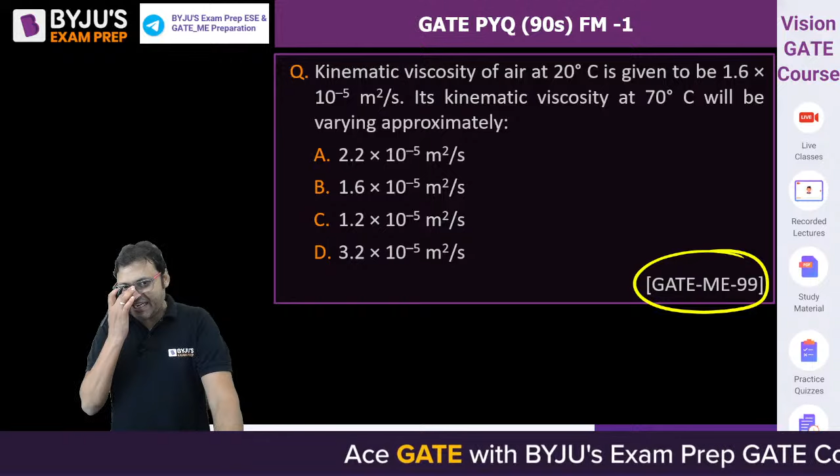Let us start with the first question from viscosity, a very important property asked in GATE. The kinematic viscosity of air at 20 degrees Celsius is given as 1.6 into 10 to the power minus 5 meters square per second. What will be the kinematic viscosity at 70 degrees Celsius? If you know the answer, if you have solved this question, please share it and give it a try. In the meanwhile, let me discuss the solution with you.

The viscosity of a gas depends on molecular momentum transfer or molecular collision. Viscosity of a liquid depends on cohesive force, whereas viscosity of a gas depends on molecular momentum transfer, which depends on molecular velocity. So viscosity is proportional to molecular momentum transfer, which is proportional to molecular velocity, and according to kinetic theory of gas, molecular velocity is proportional to T to the power 1 by 2, absolute temperature to the power 1 by 2 — that is the dynamic viscosity. The density of a gas is inversely proportional to temperature.

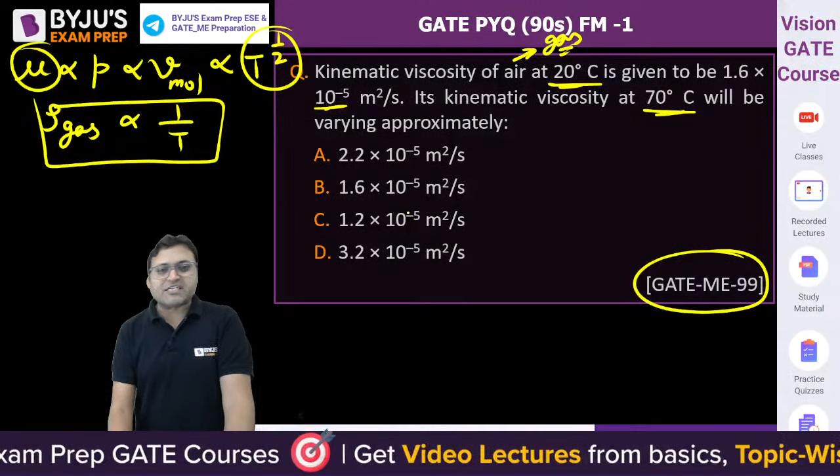So dynamic viscosity is proportional to T to the power 1 by 2, and the density of a gas is inversely proportional to temperature. So kinematic viscosity, which is dynamic viscosity per unit density, is proportional to T to the power 3 by 2. This is the relation for kinematic viscosity of a gas with temperature, and T must be absolute temperature. If the question is about dynamic viscosity, use T to the power 1 by 2, but if the question is about kinematic viscosity, use the relation that kinematic viscosity of a gas is proportional to T to the power 3 by 2.

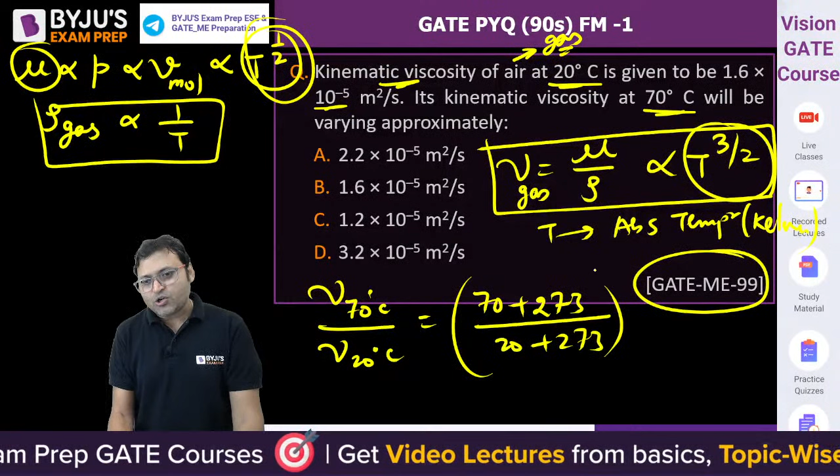So kinematic viscosity at 70 degrees Celsius upon kinematic viscosity at 20 degrees Celsius equals 70 plus 273 — it should be in Kelvin, since absolute means Kelvin, temperature must be in Kelvin — upon 20 plus 273, to the power 3 by 2. The kinematic viscosity at 20 degrees Celsius is already given, so you can find out the kinematic viscosity corresponding to 70 degrees Celsius. It will be around 2.02 into 10 to the power minus 5 meters square per second. Please check, it will be around 2.02 into 10 to the power minus 5.

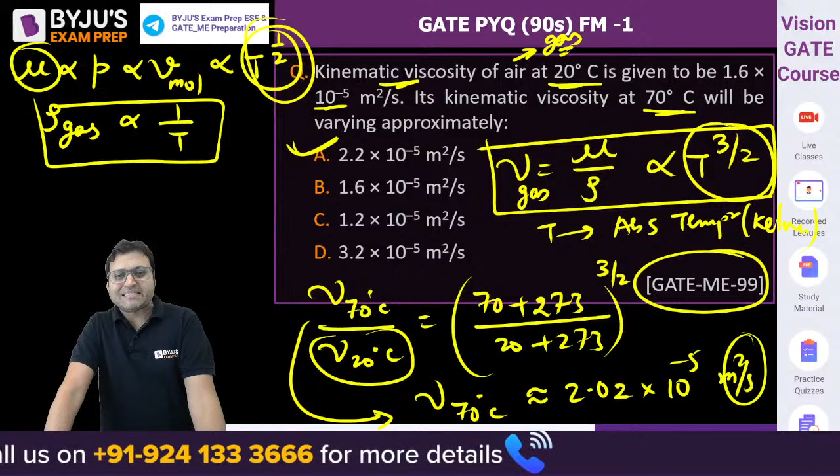So the nearest option, that is why it is mentioned as approximately, is 2.2 into 10 to the power minus 5 meter square per second. I hope it is clear to everyone. Yes or no? If you have any doubt, you can always let me know through the comment section. Let us move to the next question.

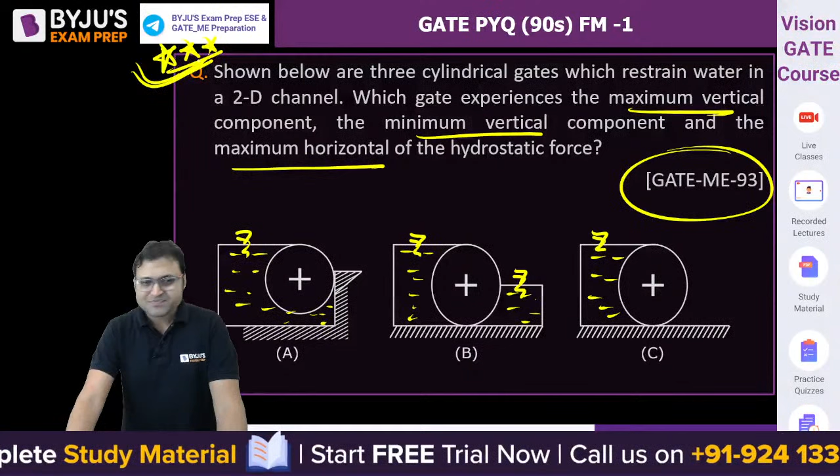This is a very, very beautiful question, a masterpiece. Shown below are 3 cylindrical gates which restrain water in a 2-dimensional channel. There is water here, in three figures. There is water here as well as here — this is the free surface, this is the free surface. And in the third figure, the water is here only. Now we need to find out which gate will experience the maximum vertical component, the minimum vertical component, and the maximum horizontal component of hydrostatic force. A very, very beautiful, marvelous question. Let me discuss this question.

I will add one more figure. Let me add one more figure — D. Now try to understand.

The fluid is water. Let us talk about the horizontal component of hydrostatic force. How do we calculate it? By taking the vertical projection.

Let us assume the cylinder has the dimension L into D, where L is the length of the cylinder and D is the diameter. So if I ask you for FH1, take the vertical projection of the cylinder.

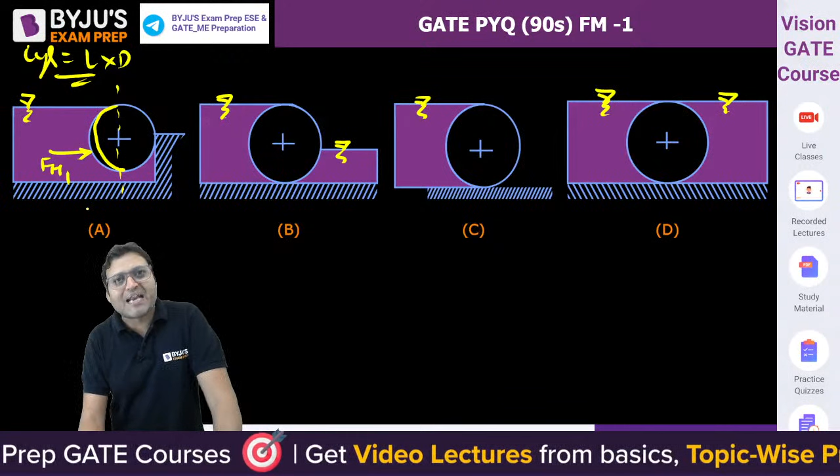That vertical projection will be a rectangle of dimension D by L. Apply rho g a x bar to the vertical projection. So FH1 will equal rho of water into g into area, which is D into L, into x bar. X bar will be D by 2.

This is FH1. For all the figures, FH1 acting on the right hand side will be the same. Now let us talk about FH2.

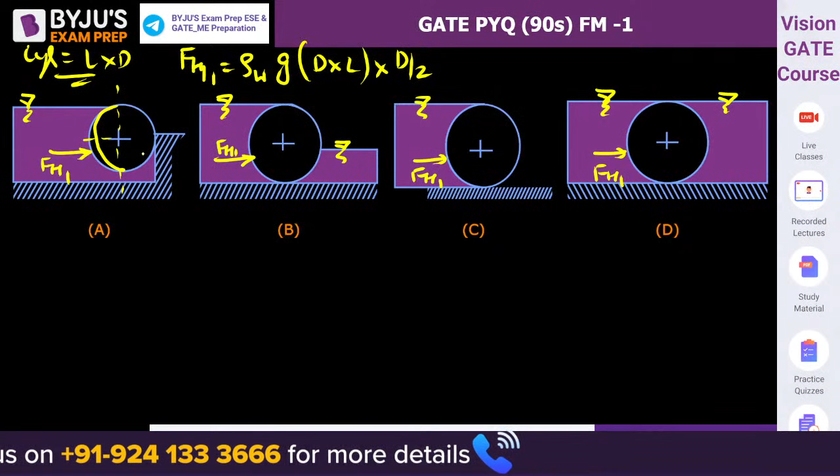Now for FH2, we will start from the right hand side. Do you agree FH2 acts here? Can we say FH2 will be equal to FH1? In figure D, FH2 will equal FH1. And what is FH net? Net horizontal force is FH1 minus FH2. Agreed or not?

FH net equals FH1 minus FH2. So in figure D, FH net will be equal to 0.

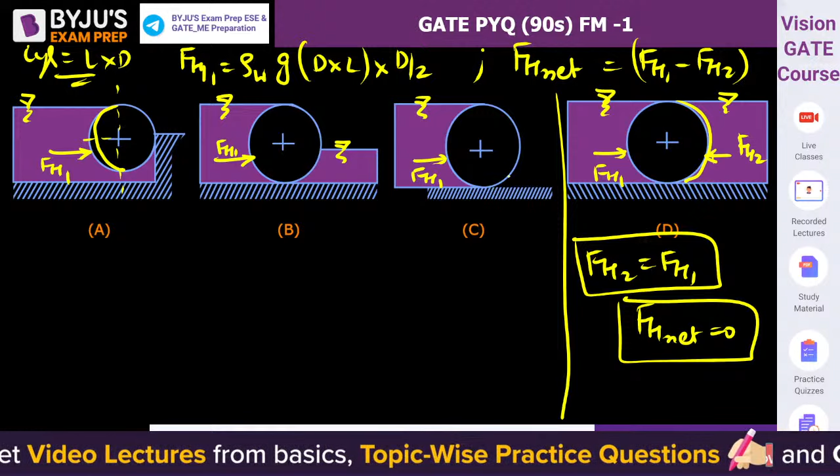Now similarly in figure C, do you agree FH2 is equal to 0? So FH net is equal to FH1 only.

That's figure C. If we talk about figure B, this will be FH2. Take the vertical projection. So here FH2 equals rho of water into g into area, which is D by 2 into L, into x bar.

This is the free surface. X bar is the depth of the centroid of the vertical projection from the free surface. So it will be D by 4. FH2 will correspond to D by 4.

Now if we talk about figure A, the FH2 projection will be the same, but the free surface is here. This is the level of the free surface. So FH2 is rho of water into g into area of the projection, which is D by 2 into L.

But if we talk about x bar, then it will be D by 2 plus D by 4. Do you get it? In figure A, FH2 will correspond to D by 2 plus D by 4.

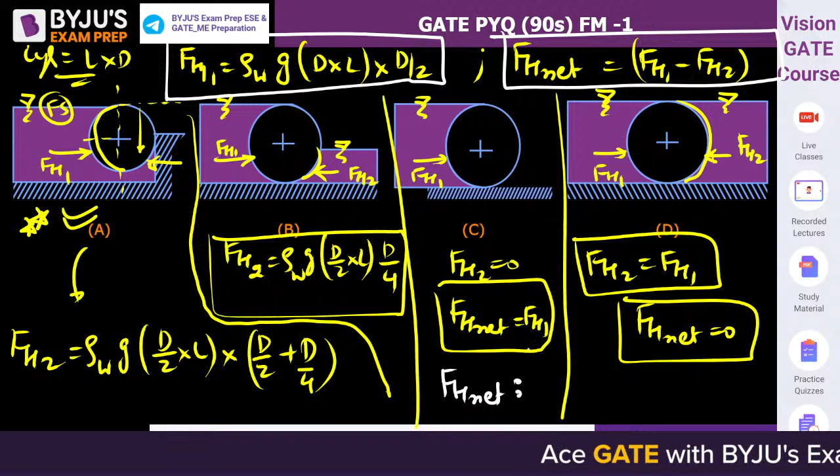So if we write the decreasing order of FH net, do you guys agree with this? FH1 is the same for all, and FH net equals FH1 minus FH2. So if we write the order of FH net in decreasing order, which will have the maximum? That is C. C will have the maximum and D will have the minimum FH net.

And out of A and B, FH2 in A is greater than FH2 in B, isn't it? So do you agree the order will be B and then A? This will be the order: C, B, A, D. C is maximum, then B, then A, and finally D. This is FH net.

Similarly, if we talk about FV net, FV net is nothing but the buoyant force. This is the buoyant force. FV net is the buoyant force.

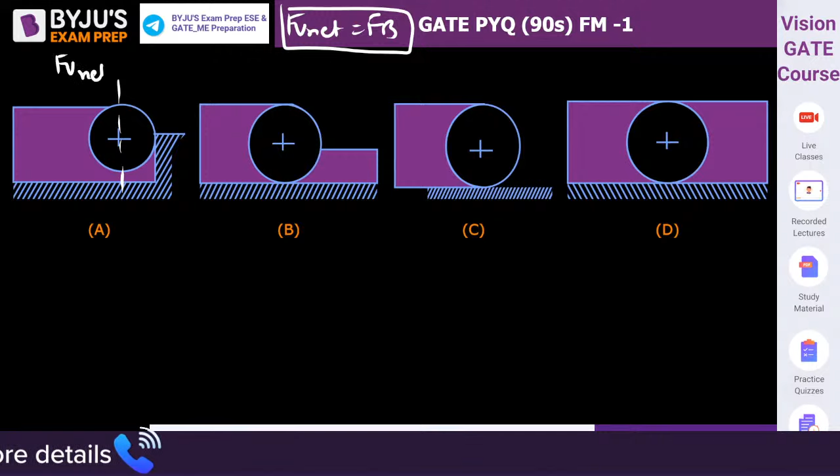So if we calculate FV net, the vertical upward force is FV1 plus FV2. Let me start with the first part, call this FV1. This will be given by rho into g into V by 2. FV1 equals rho of water into g into volume by 2.

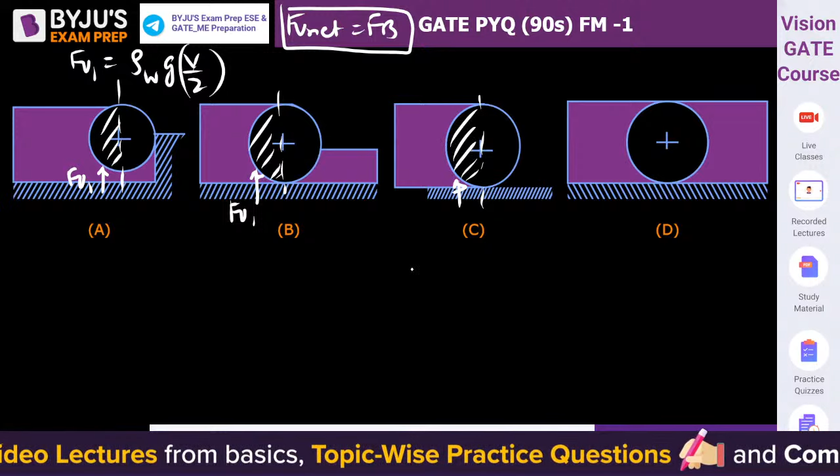Similarly, for the second figure, FV1 is the same. If we talk about figure C, FV1 is rho into g into V by 2, because there is a downward force on the top and an upward force on the bottom. Similarly for figure D, FV1 will be the same in all figures.

Now, if we talk about FV2 in figure D, we can say FV2 equals FV1. And what is FV net? That equals FV1 plus FV2, because both are vertical. So FV net here will equal rho of water into g into V. That is FV net for figure D.

So FV2 is equal to 0 for C. So FV net is equal to rho into g into V by 2, only FV1. If we talk about figure B, rho into g, what is FV2?

FV2 is equal to rho of water into G into V by 4. So FV net will be equal to rho of water into G into V by 2 plus V by 4, that is 3V by 4.

Now if we talk about figure number A, that is most important. Weight of the fluid displaced by the body, the free surface is here. In figure number A, the free surface is here. So what we need to do is find out the weight of the fluid which is displaced by the body.

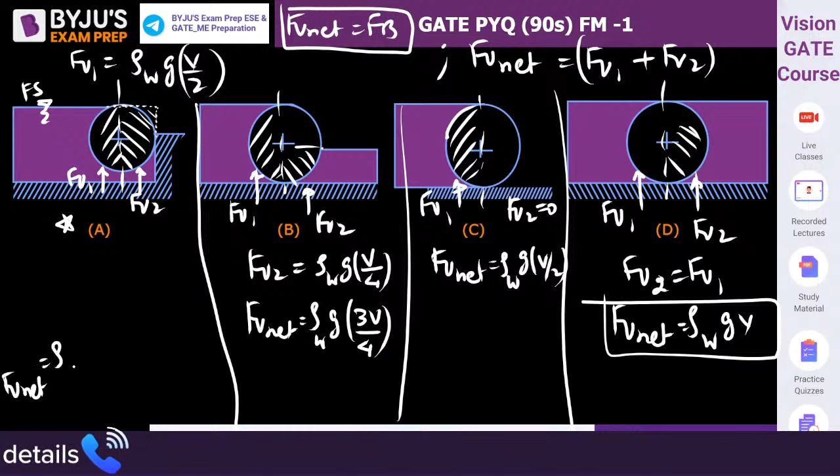This will be FV net, this is FV2. FV2 will be given by this. So here FV net is equal to rho of water into G into 3V by 4, plus D by 2 into D by 2 into L. Other than 3V by 4, this portion will also be there, so D by 2 into D by 2 into L.

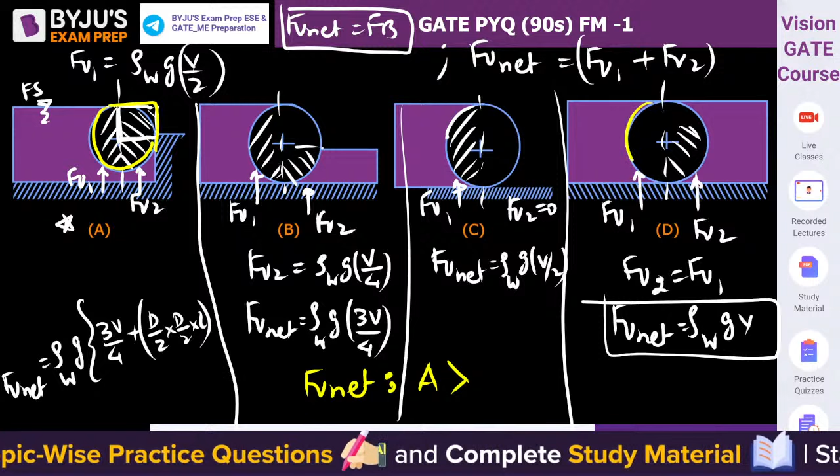So the maximum is in A. If we talk about FV net, maximum is in A, it is more than the volume of a cylinder. Then it is in D, equal to volume of the cylinder. Then it will be in B, 3/4 of the volume of the cylinder. These are the buoyant forces. Finally C, which is half of the volume of the cylinder. Do you agree? This is how FV net is.

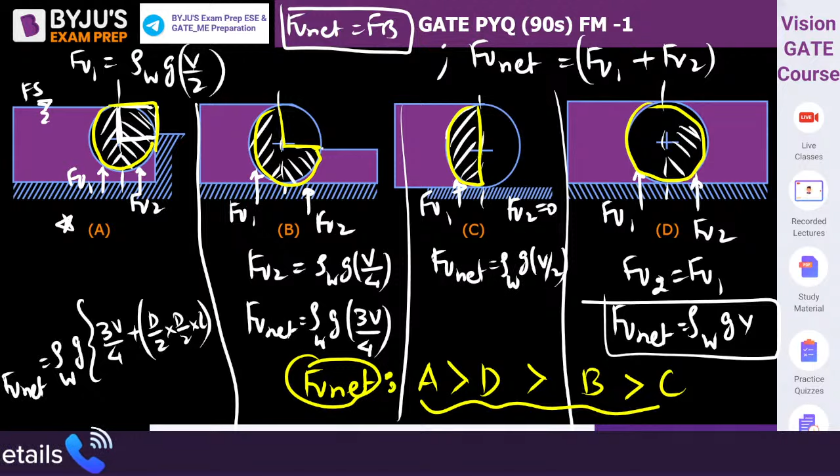This is the decreasing order. No two figures will have the same FH or same FV. This is the buoyant force, this is the buoyant force. So if we solve this question, the maximum vertical component is in A. FV maximum is in A.

The minimum vertical FV minimum will be in C. And FH maximum, out of these, which will have FH maximum? FH maximum will be in C. These will be the answer. Do you understand? Is this all clear? Yes or no? Everybody please write in the comment section if it is all clear to everyone.

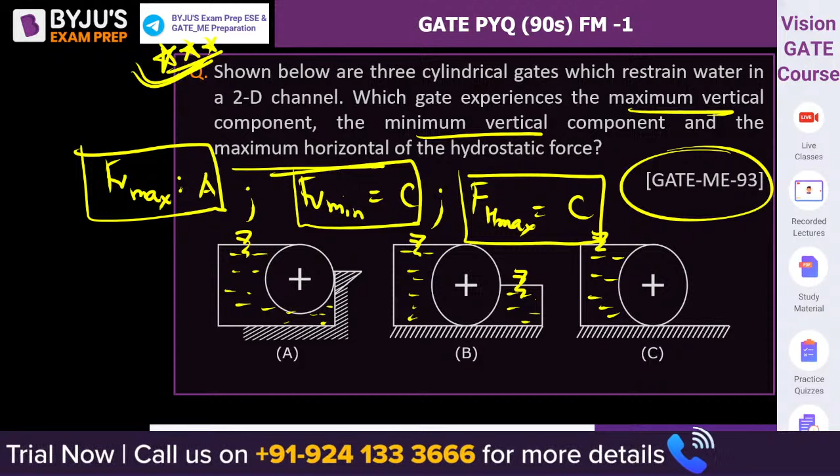This is a wonderful question. A numerical can also be framed out of this.

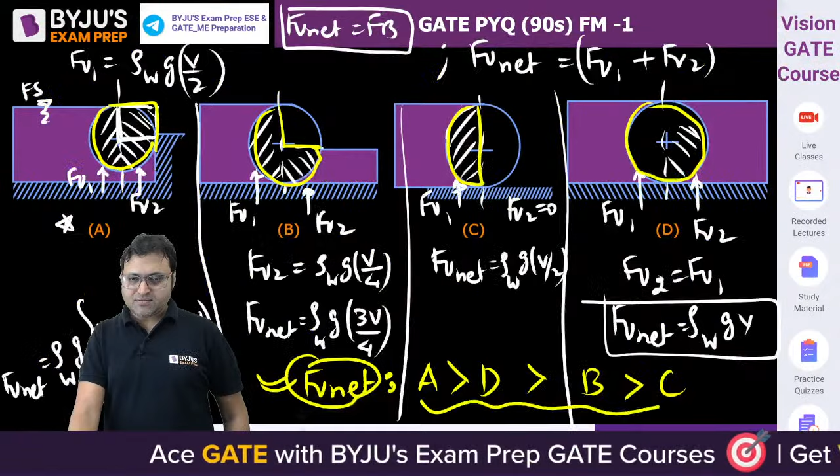The next question, this was asked in GATE 96. A mercury manometer is used to measure the static pressure at a point in a water pipeline. This is point A, let us say. Static pressure at a point in a water pipe as shown in figure.

The level difference of mercury in the two limbs is 10 mm. This is the difference in the level of mercury, 10 mm. This will be 10 mm.

The gauge pressure at point A is asked. So the problem which many students faced was this distance is not given. The dimension which is not given, we can assume it as 0, negligible. So if we assume it as 0, if this is PA, we can say this point will also have the pressure PA. So if we write the pressure equation, this can be assumed as PA, then this will be the datum line. On this line the pressure will be equal.

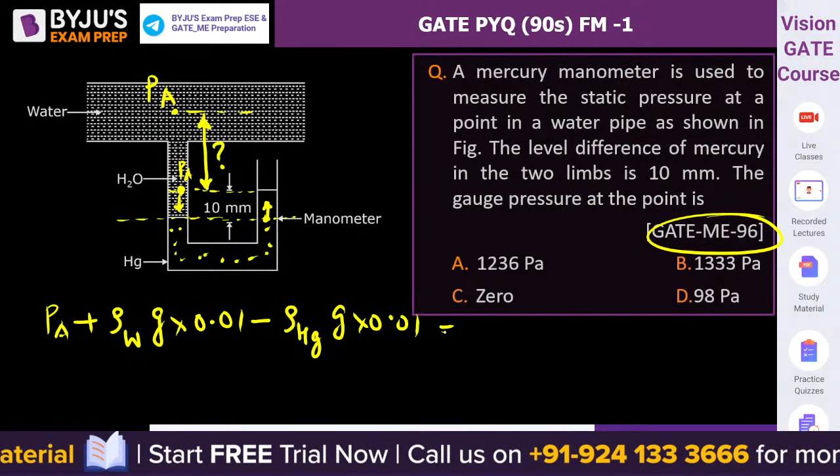So from PA we are moving in downward direction, plus rho of water into G into 10 mm, that is 0.01 meter. Then we reach here, jump, then we are moving in upward direction, minus rho of mercury into G into 0.01, is equal to, here the gauge pressure will be 0.

This is the pressure equation. Write the pressure equation, then PA will be equal to rho of mercury, 13,600 minus 1000, into G, that is 9.81, into 0.01 Pascal. This is the gauge pressure at A. What will be the answer? Can you solve it and let me know the answer for this one?

It will be option A. Are you getting option A or not? Do you guys understand? The dimension, the distance which is not given in the question, you can assume it as 0.

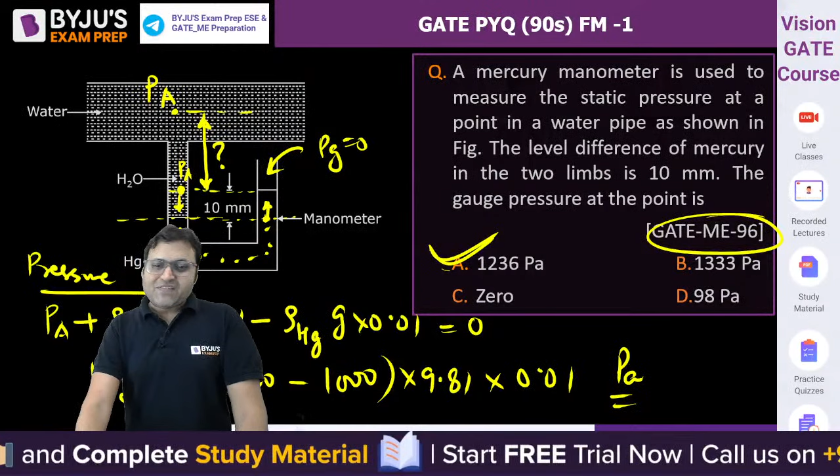You can assume it as 0. Otherwise, you cannot solve. If one of the options is data insufficient, then you should select that. The next question was asked in GATE 88.

There is a circular plate of diameter 1 meter submerged vertically in water such that its upper edge is 8 meter below the surface of water. This distance is 8 meter. This is the free surface. The total hydrostatic force on one side of the plate is, can you solve it? This is the center of the plate and the depth of centroid of the plate from the free surface is x bar. Do you agree x bar is equal to 8.5 meter?

So the force will be equal to rho of water into g into area into x bar. This will be the formula. So rho of water is 1000 into 9.81 into area pi by 4 d square into 8.5. That will give you in Newton. So in kilonewton it will be 9.81 into pi into 8.5 divided by 4 kilonewton. That will be the force. It is simple.

And the force is always acting at center of pressure. Can you find out the depth of center of pressure as well? Can you find out the depth of CP, HCP? Do you know how to find out?

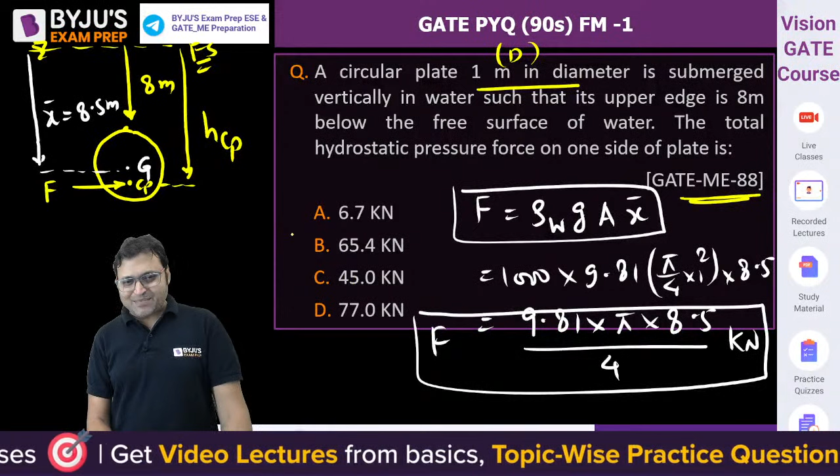Yes, B will be the correct answer. Well done guys, well done. Keep it up. Good, good, good.

Can you find out the depth of CP? Very simple. Use the formula. HCP is equal to x bar, that is 8.5, plus IG, that is pi by 64 d to the power 4, upon area pi by 4 d square into x bar. If you solve this, you will get HCP greater than 8.5 meter. X bar plus IG by A x bar. IG will be equal to pi by 64 d to the power 4. Let us move to the next one.

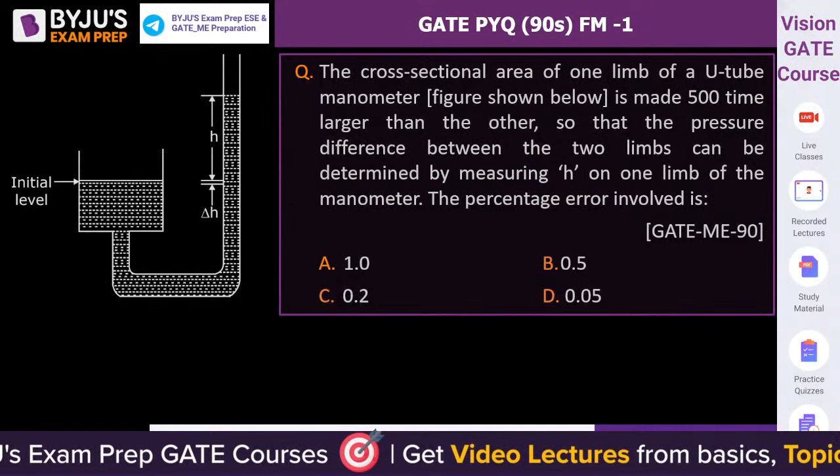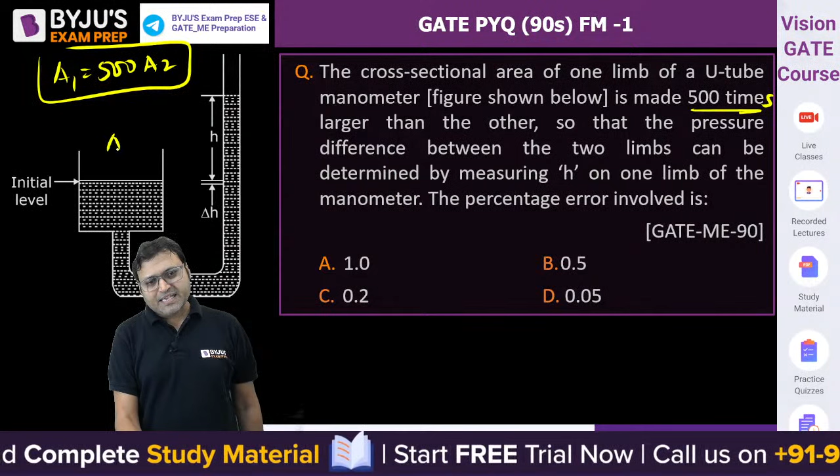This question was asked in GATE 90. Read the question everybody. The cross-sectional area of one limb of a U-tube manometer, shown in figure, is made 500 times larger than the other. So we can say A1 is equal to 500 times A2. This is A1, this is A2. It is a single column manometer, so that the pressure difference between the two limbs can be determined by measuring H only.

Yes, Rohan, that is correct. It is 8.507 something. Good.

Determined by measuring H on one limb of the manometer. The percentage error involved is? Error is equal to actual pressure minus measured pressure. So if we find out the actual pressure, let us say P is the pressure, and this was the initial level.

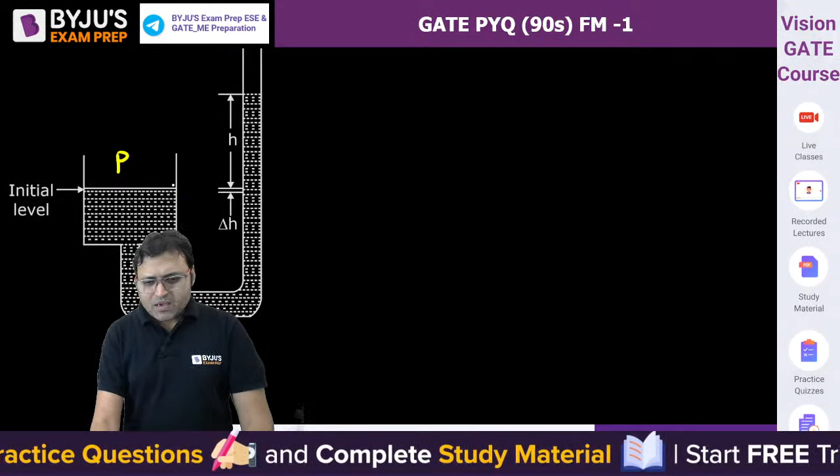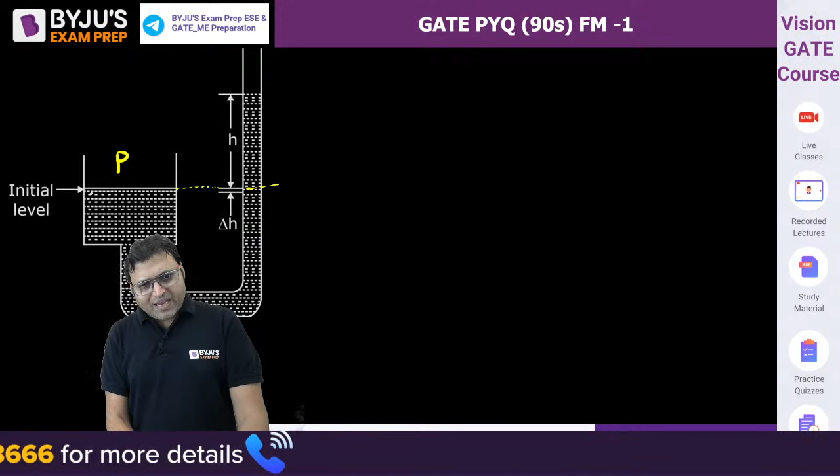It is having an initial level like this. When both the limbs are open to atmosphere, this was the initial level. Whenever the pressure P is applied, the level will slightly go down. This is the new level. Here the pressure is P, and there will be a rise in level in the right limb.

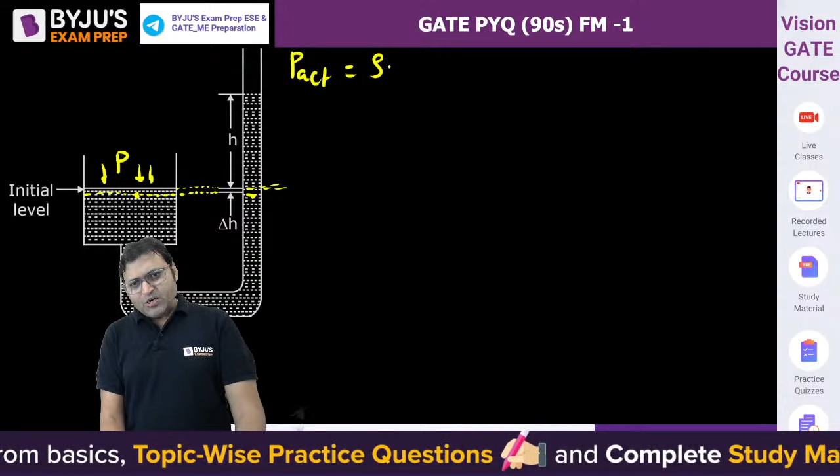So P actual will be equal to rho of mercury, is it mercury? Nothing is mentioned about the fluid. Rho into g into H plus delta H, isn't it? That is P actual. But if we ignore this delta H, because A1 is very large compared to A2, delta H is very small. So P measured will be simply rho g H.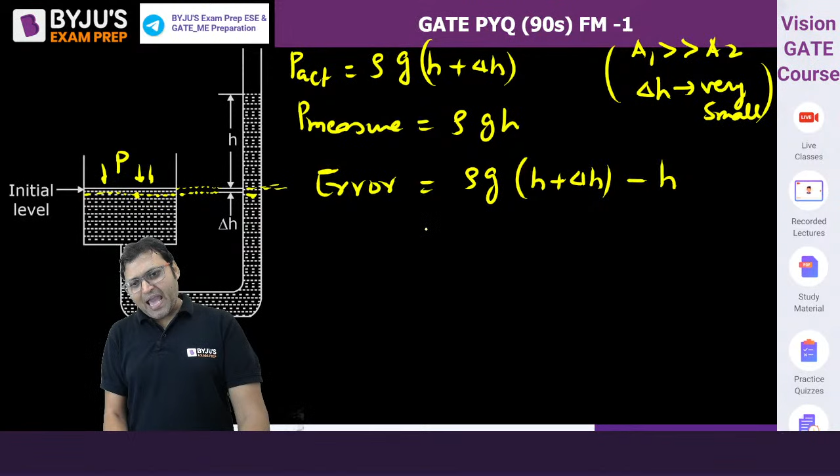So error will be equal to rho into g into H plus delta H minus H, which is rho into g into delta H. This is the error. And percentage error is error divided by measured pressure into 100. So rho g delta H upon rho g H into 100. Rho g gets cancelled out. This will give you the percentage error.

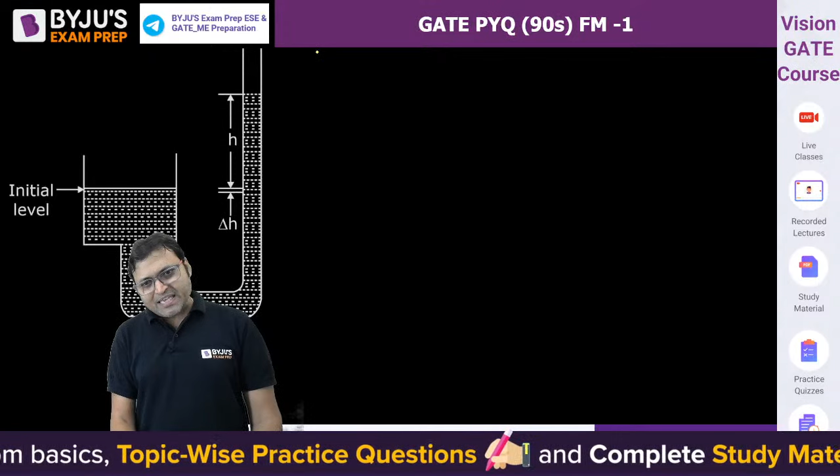So how to find out delta H by H? The volume of manometric fluid always remains constant, because we are neither adding nor removing any fluid. So the volume decreasing in the left limb, A1 delta H, is equal to volume rising in the right limb from the initial level, A2 into H. And A1 is 500 A2, so 500 A2 into delta H is equal to A2 into H.

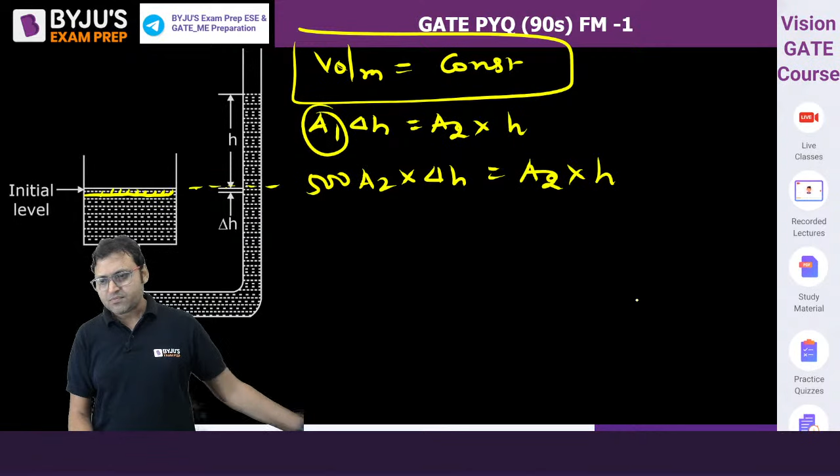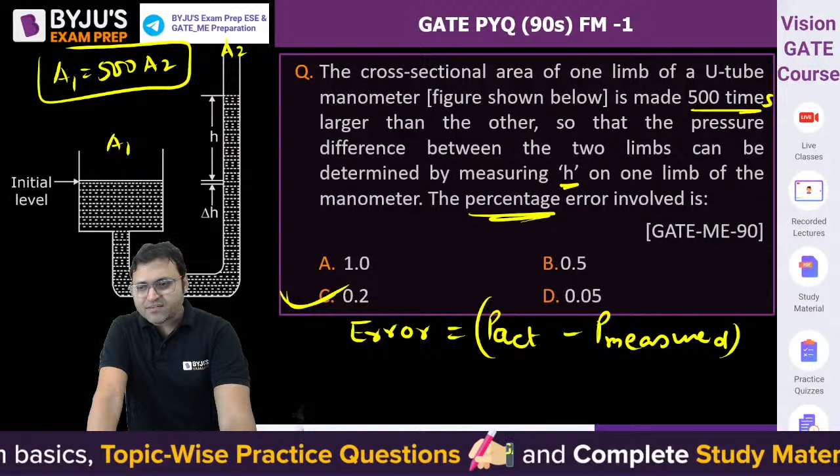A2 getting cancelled out. So delta H by H into 100 is equal to 1 by 500 into 100. How much is that? That is 1 by 5. That is 0.2%. Percentage error will be equal to 0.2%. I hope it is clear to all of you. Do you guys understand? There is an error in the measurement. C will be the answer. This was asked in GATE 90.

Anybody is having any doubt? Anything to ask? The next question is again beautiful, which was asked in GATE 95. The force F, this is the force F which is needed to support the liquid of density D. The liquid is having a density D. What will be the force required to hold the piston which is of area capital A, and there is a liquid in the vessel and the tube of the vessel is having the area small a. So there are two ways.

Are you able to? Am I audible and visible or not? Can you guys hear me? Yes.

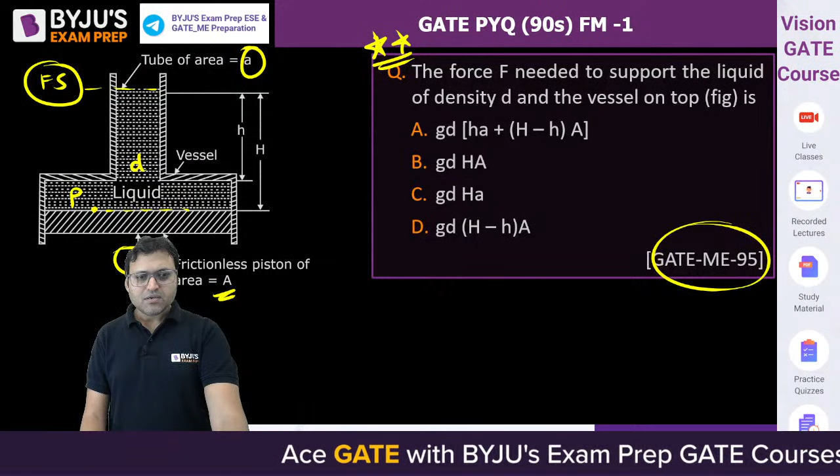So the force F needed to hold. What we can do is we can find out the pressure here. What will be the value of pressure here? One method is finding the pressure at this location. This is the free surface. At the free surface, pressure is P atm or gauge pressure will be 0. So the pressure is given by, because this point is at a depth of capital H, density D into G into capital H.

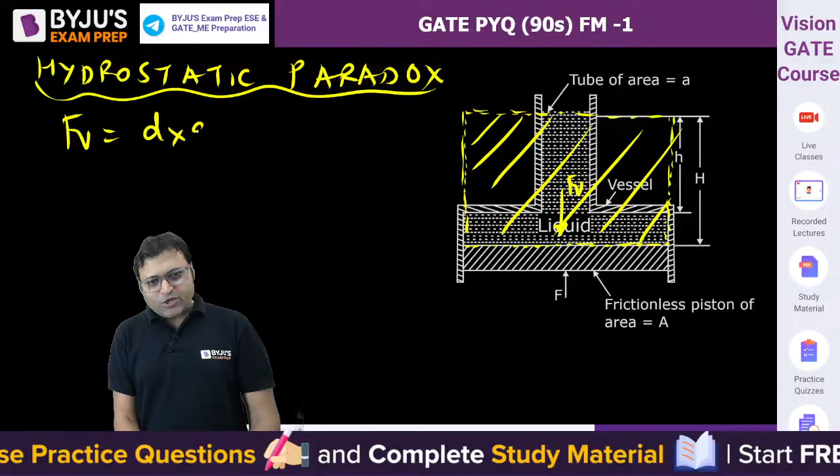That is the pressure, and the force required will be equal to the downward force exerted, rho into G into area into capital H. That will be equal to F required. So the correct answer is option B. B will be the right answer.

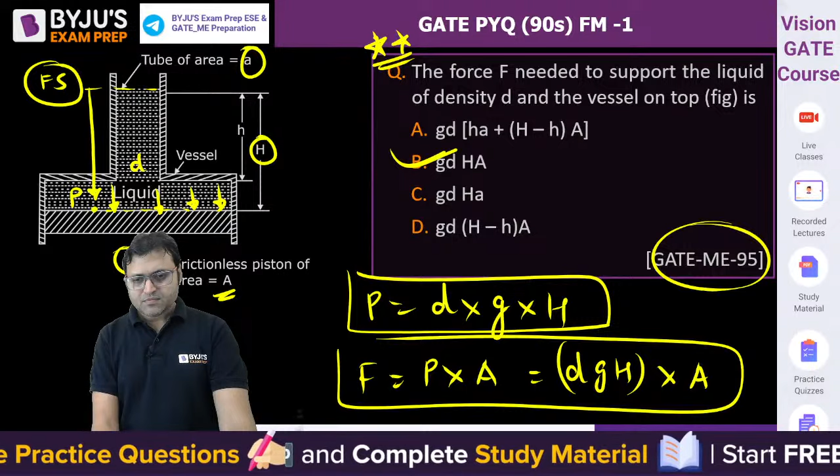So the right answer is option B. The right answer is option B, not C. That is called as hydrostatic paradox. I hope it is clear to everyone. So let us move further.

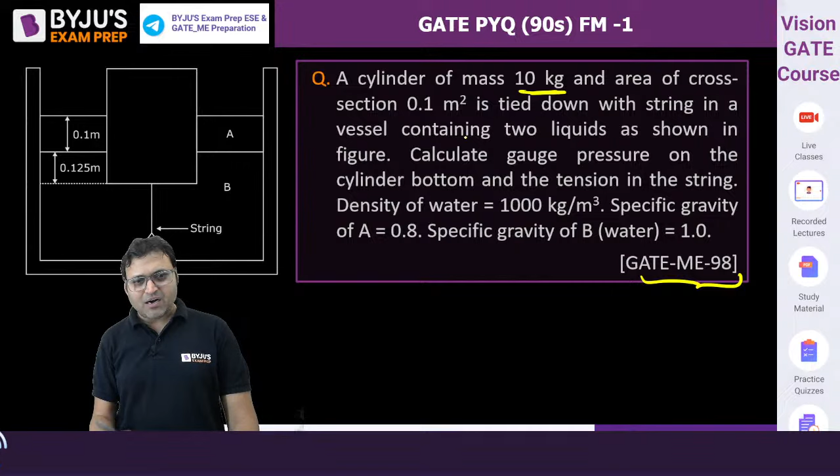The next question, this was asked for 3 marks or 5 marks in GATE 98. Now it is fine. A cylinder of mass 10 kg. This is again from pressure. A cylinder of mass 10 kg and area of cross section 0.1 meter square is tied down with a string in the vessel containing 2 liquids as shown in figure. There are 2 liquids A and B.

Calculate the gauge pressure on the cylinder bottom. Can you find out the gauge pressure at the bottom of the cylinder? And the tension in the string. 2 things we need to calculate. Density of water is this. Specific gravity of A is 0.8. It means A is some oil having the density as 800. Specific gravity of B is 1. That is water. B is water only.

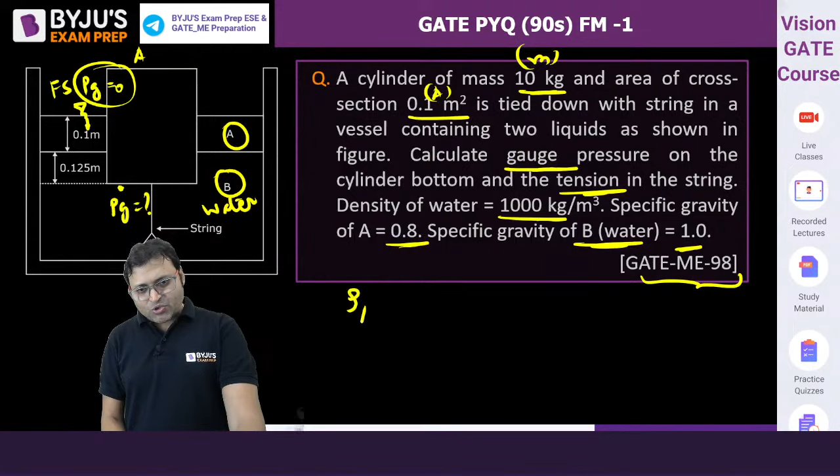So can you find out the gauge pressure at the bottom? At the free surface, the gauge pressure will be 0. We are traveling in downward direction, in A. So rho A into G into 0.1 is the pressure at the interface, plus rho of B into G into 0.125. That will be the gauge pressure at the bottom, PB gauge. Can you find it out?

Density of A is 800 into 0.1 plus 1000 into 0.125 into 9.81. What is the answer? What is the gauge pressure at the bottom B? Can you find out the gauge pressure at the bottom B? Are you getting 200? It is 2.01. How much are you getting? Are you getting 2011.05?

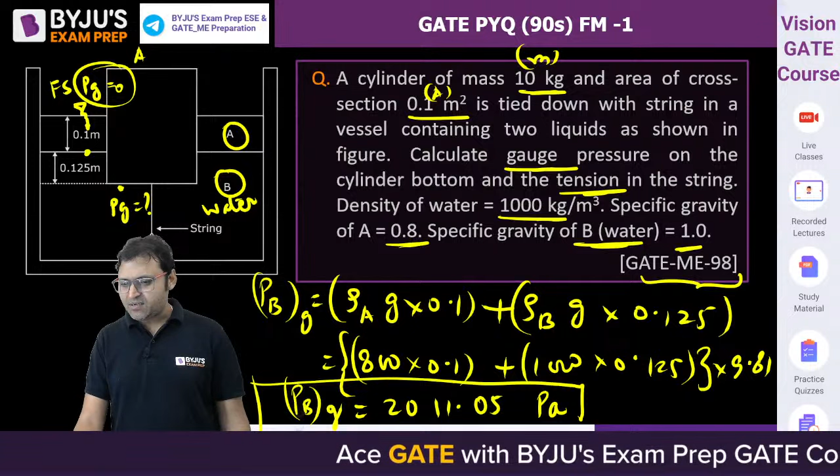Are you guys getting gauge pressure as 2011.05? Yes, 2.01 kilopascal. Well done. It will be 2.01 kilopascal. 2011. Right?

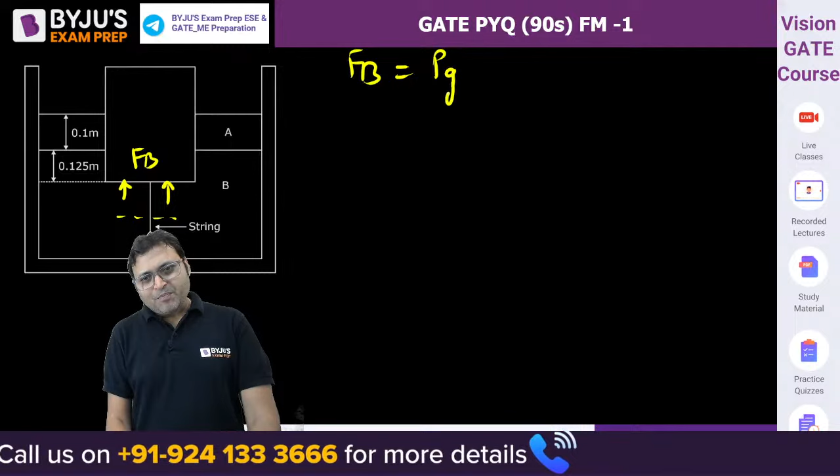Now, how to calculate the tension? So the force at the bottom will be the buoyant force due to pressure. That is called the buoyant force, in the upward direction. So buoyant force is equal to pressure into area. Area is 0.1. So buoyant force is equal to 201.105 Newton. And if we cut the string here, tension is acting in the downward direction and weight of the cylinder is acting in the downward direction.

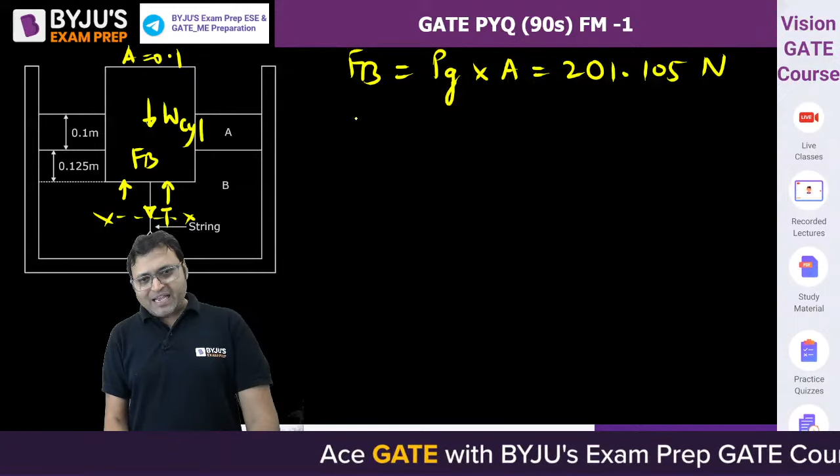So we can say weight plus tension is equal to buoyant force. So tension is equal to buoyant force minus weight. And what is the weight? Weight is equal to M into G. G is 9.81 and M is equal to 10 kg. So tension is equal to 201.105 minus 10 into 9.81. This will be in Newton.

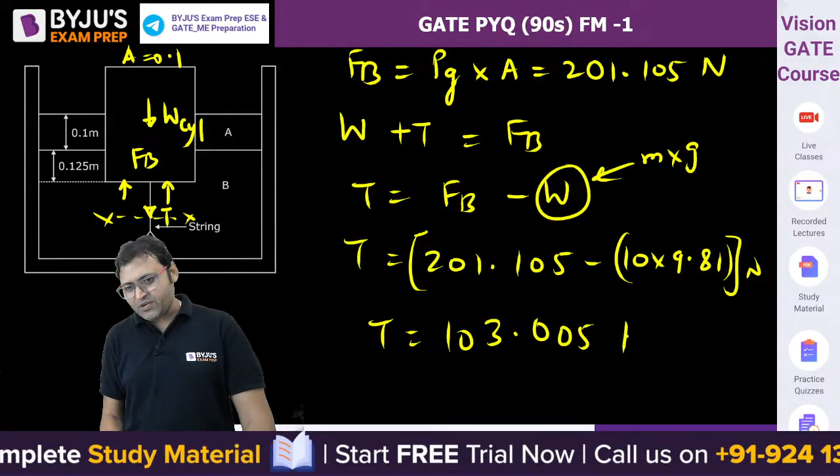So tension in the string. How much is the tension in the string? Are you getting 103.005 Newton? 103. Are you getting tension as 103? Tension will be 103.

The next one from kinematics. A Newtonian fluid has the following velocity field. The rate of shear deformation epsilon yz at the point x = -2, y = -1 and z = 2 for the given flow is. So if we equate it to ui cap plus vj cap plus wk cap, what are you getting? U is equal to x square y, v is equal to 2xy square into z, and w is equal to minus yz cube.

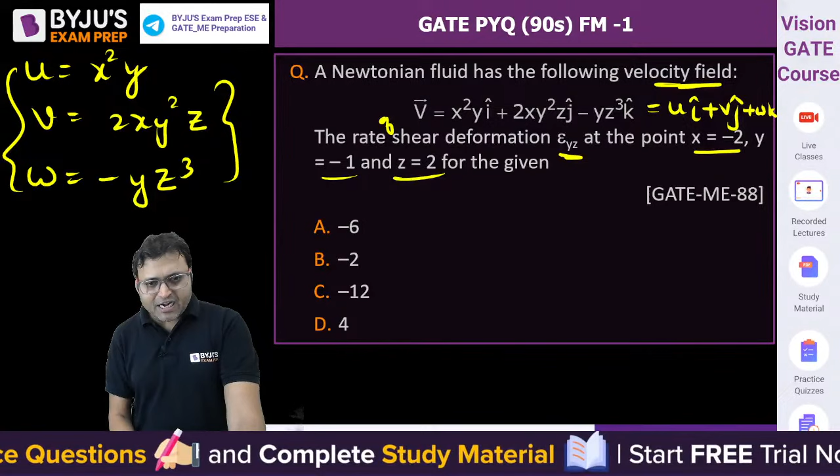Are you getting this? And the rate of angular deformation in the yz plane is equal to del w by del y plus del v by del z. What is del w by del y? That is minus z cube, plus del v by del z. Del v by del z is 2xy square. That is epsilon yz. Put the value, z is equal to 2.

So it will be minus 2 cube plus 2, x is equal to -2, and y square. What is y? Y is equal to -1, square. What will be the answer? Epsilon yz, what do you get? So it is -8. This will be -4. So -12 is the answer. C will be the answer.

C will be the answer. C hoga na, -8 -4. It will be -8 -4. C will be the correct answer. Are you getting it or not? Any doubt you are having, do let me know.

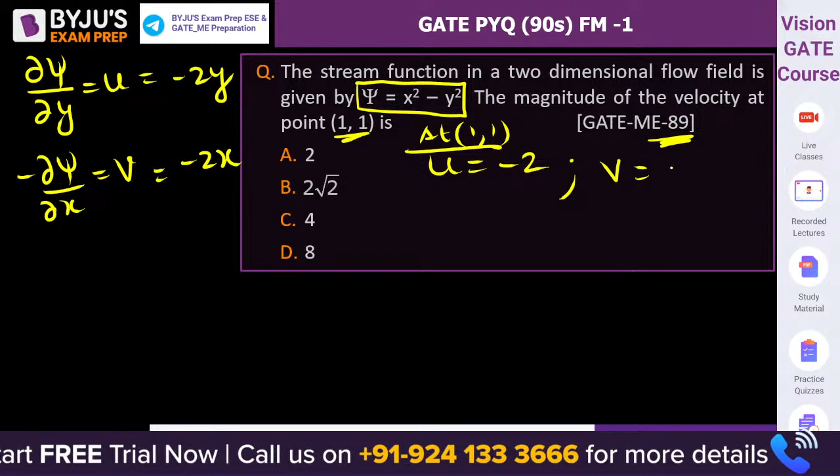So at 1, 1, u is equal to minus 2 and v is equal to minus 2. So the magnitude of velocity is equal to under root of u square plus v square, that is under root of minus 2 square plus minus 2 square. So it will be 4 plus 4, under root. Sorry, under root of 8, not 16. It will be under root of 8. So isn't it 2 root 2?

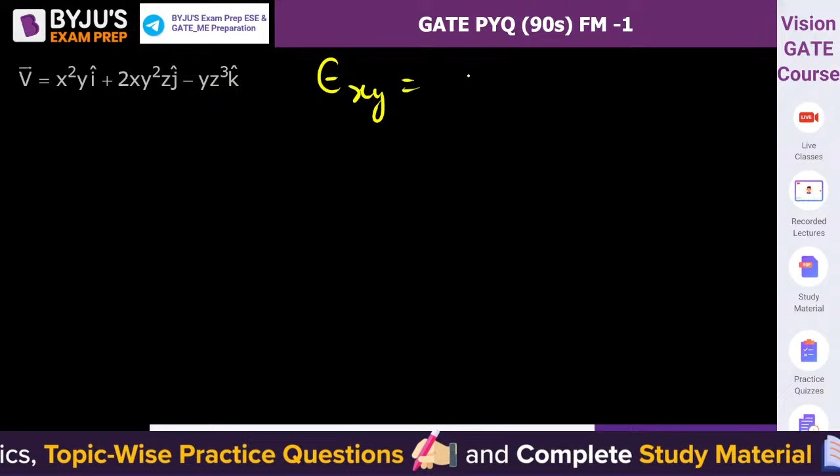Del v. Deformation mein half nahi aata hai because rate of angular deformation is the total rate of change of angles of initially drawn perpendicular line segments. Total rate of change of angles for the initially drawn perpendicular line segments.

Agar angular velocity hota to half aata. Angular velocity chahiye omega z, that is the angular velocity about z axis. Angular velocity mein hota half into del v by del x minus del u by del y.

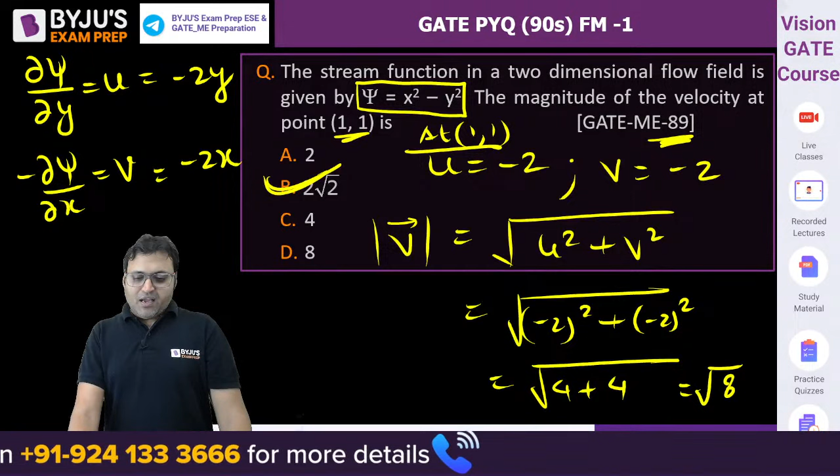And angular deformation is about the total change. The next one, this was asked in 93. A velocity field is given by this expression.

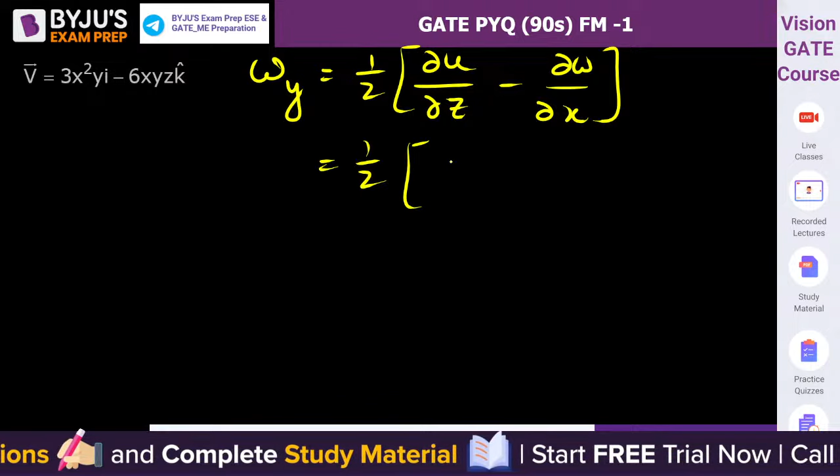Half of del u by del z minus del w by del x. Find out half of del u by del z, 0, minus del w by del x, that is minus 6xy. It is not 0, so it is rotational. So it is not irrotational.

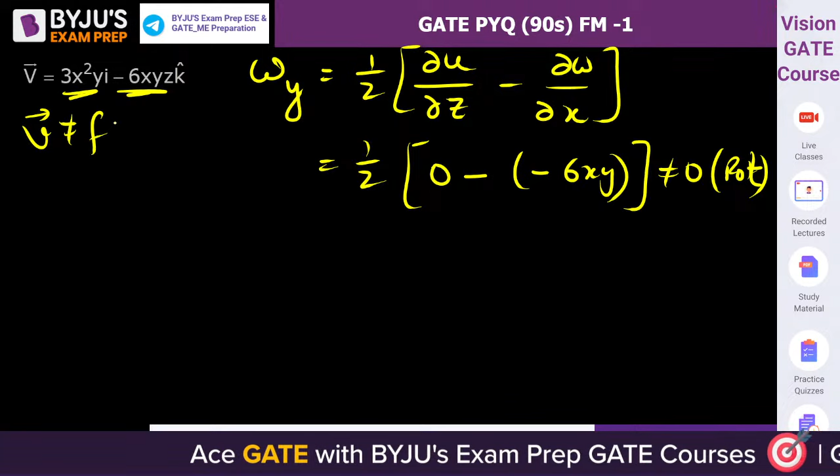Whether the flow is steady or not, do you see V is not a function of time? So it is steady flow. Because there is no time coordinate involved, the flow is steady as well. So 1 and 3 will be the answer.

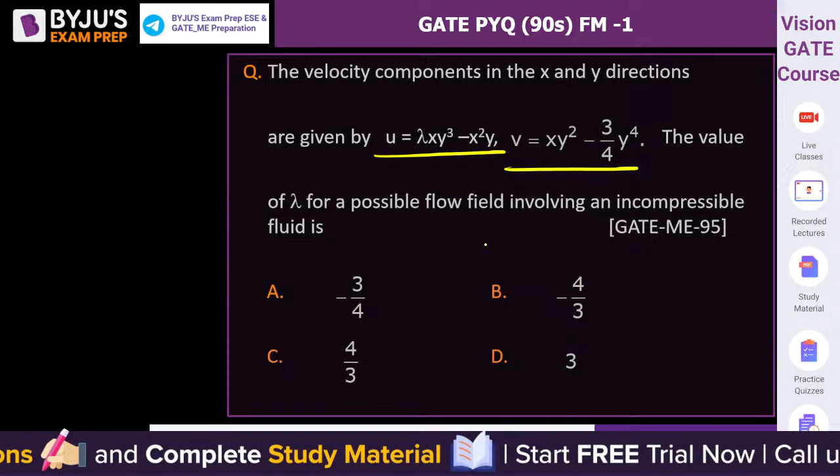The next one, the velocity component in x and y direction are given by this u and v. The value of lambda for a possible flow field involving an incompressible fluid. You need to do del u by del x plus del v by del y is equal to 0. That is the continuity equation for incompressible flow. You will find the value of lambda.

The similar type of question. You can solve it. If you solve this, then you will get option D. Find out del u by del x, find out del v by del y, add them and put 0. You will get the value of lambda. D will be the answer.

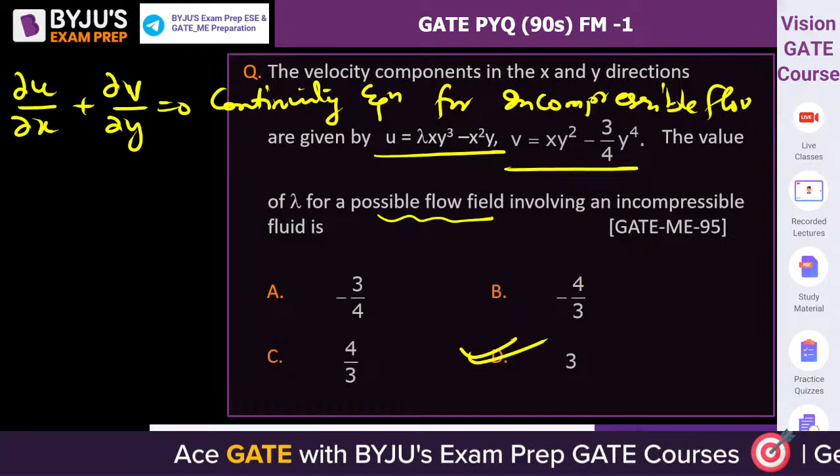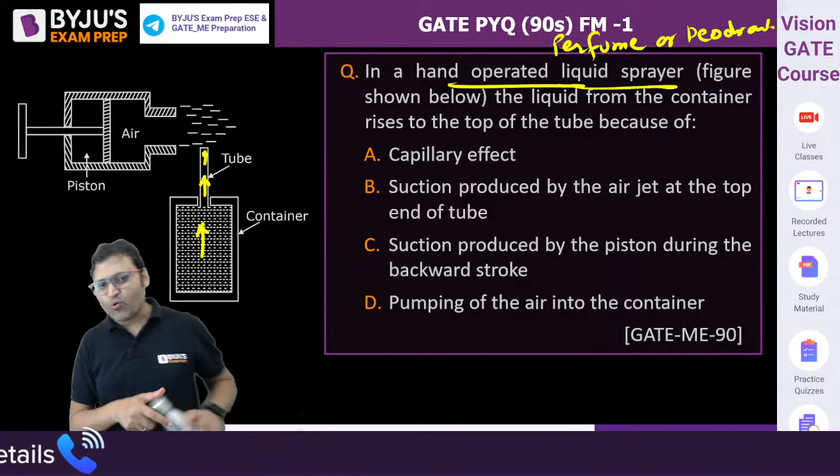How the liquid rises to the top? What is the answer? How the liquid in the container will rise? Due to movement of the piston, air velocity will increase, and due to Bernoulli principle the pressure will decrease. Here the suction will be created.

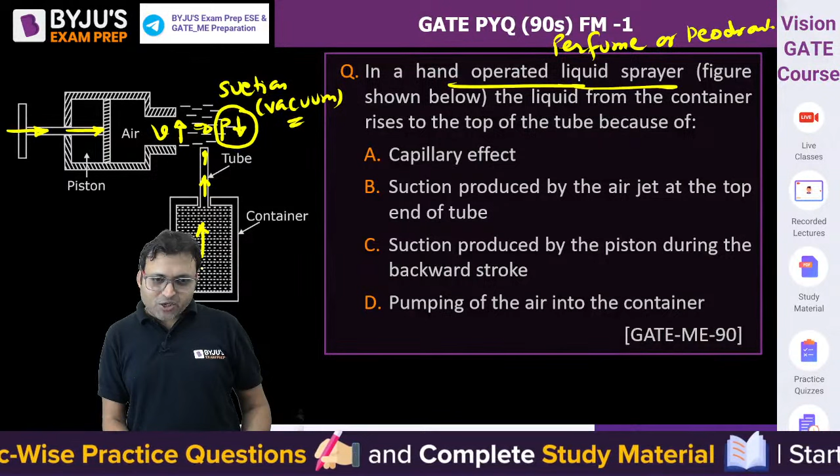Pressure will decrease, and due to decrease in pressure, suction or vacuum is created, and due to this vacuum the fluid rises to the top. It is not due to capillary effect, it is due to suction produced by the air jet at the top end of the tube. B will be the answer.

That is how the hand-operated sprayer works. The next one: shown in the figure are 3 pipe sections through which water flows. This was asked in '93. Yes, there are 3 pipe sections, pipe 1, pipe 2 and pipe 3.

Options A to D below pertain to the direction of the net force on the pipe, the direction of the force on the pipe section due to flow of water. State which of the options indicate the correct direction of force for pipe 1, pipe 2 and pipe 3. There will be different options for different pipes. Can you find out? For pipe 1, what will be the direction of force?

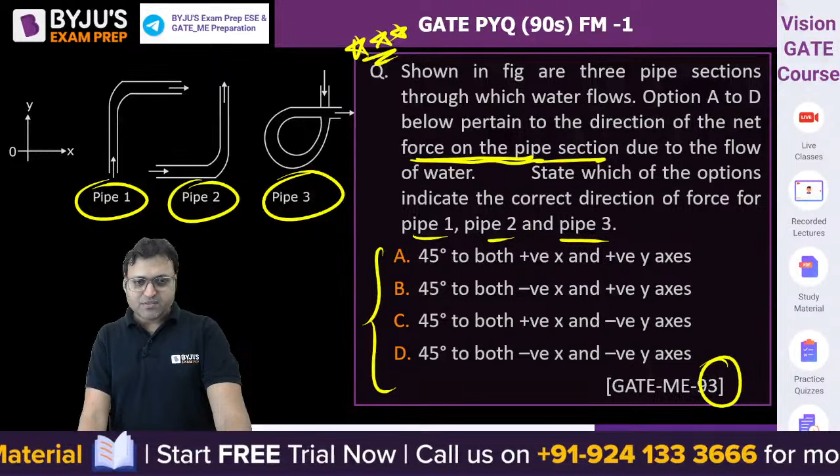This is a question from the momentum equation, but the momentum equation is not required. It is only about the direction of force. Whenever there is a bend in a pipe, there will be force developed on the pipe as well as on the fluid, and according to Newton's third law, for every action there is an equal and opposite reaction.

Look, if we talk about pipe 1, this is the bend section. If I show you this bend, the fluid will exert a force. The water will be exerting a force which is normal and compressive on the bend like this.

Because of less area at the inner walls and less pressure, inner walls will have lesser pressure, outer walls will have more pressure. So Pi is less than Po and area Ai is less than Ao. So outer walls will experience more force, inner walls will experience less force.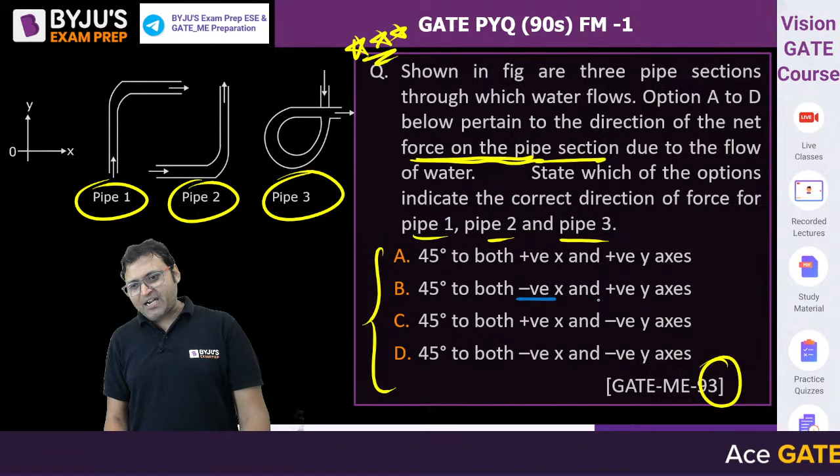So the direction of force F on the pipe will be like this. It is 45 degrees to negative x and 45 degrees to positive y, isn't it? So this is B on the pipe.

If the question would have been about the water, the force on water would have been like this. Opposite. Similarly for pipe 2, can you find out? This is the bend section. This is how the bend will look in the second case.

The fluid will exert a force which is normal and compressive. Inner walls will experience less pressure and outer walls will experience more pressure. So the net force will be like this. This is 45 degrees to positive x and 45 degrees to negative y, isn't it? This is force on the pipe.

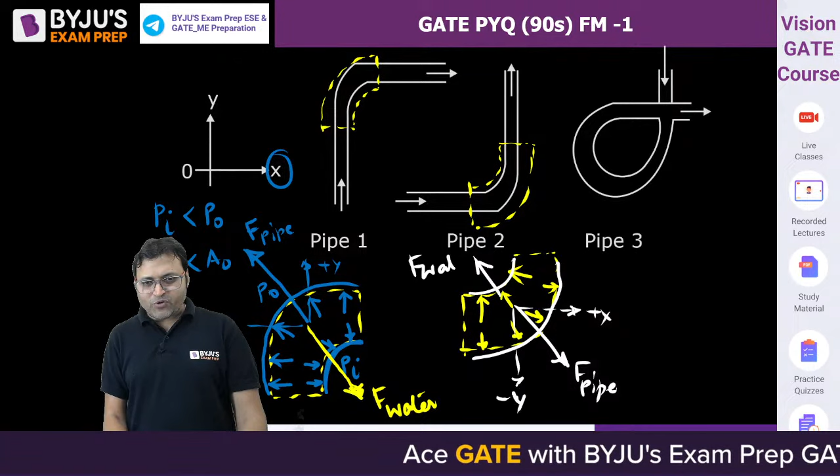This is C. And if the force would have been on the water, it would have been opposite to this. Similarly the third case, this is the bend portion. Inner walls will experience less force because of less area, less pressure. Outer walls will experience more force. Pressure force is always normal and compressive. So the net force on the pipe will be like this.

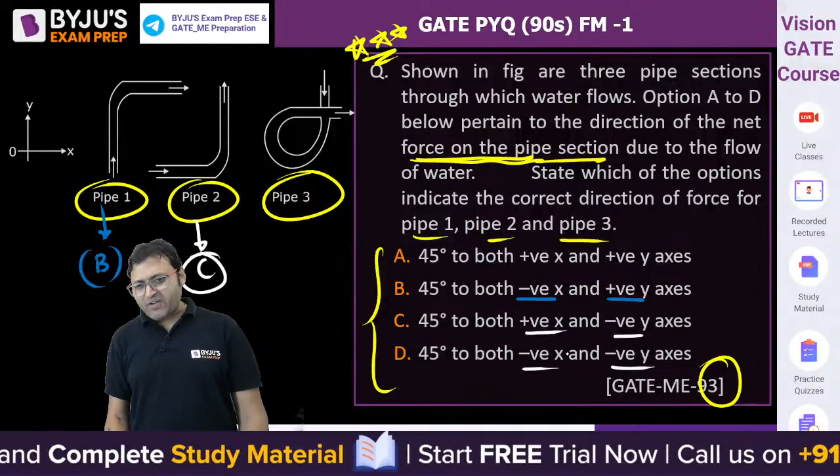So it will be 45 degrees to negative x and 45 degrees to negative y. So for pipe 3, D will be the answer. For pipe 1, B, for pipe 2, C, and for pipe 3, D. B, C, D will be the answer. Do you understand? Yes. Well done, Rohan. Do you guys understand?

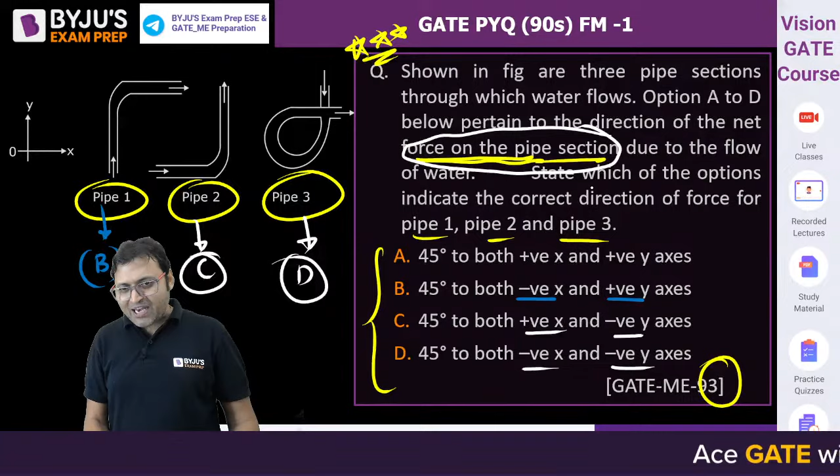If the question would have been to find out the force on the water, then your direction would have been different. In the third case, the force on water would have been like this. But the question is about the force on the pipe. I hope this is clear.

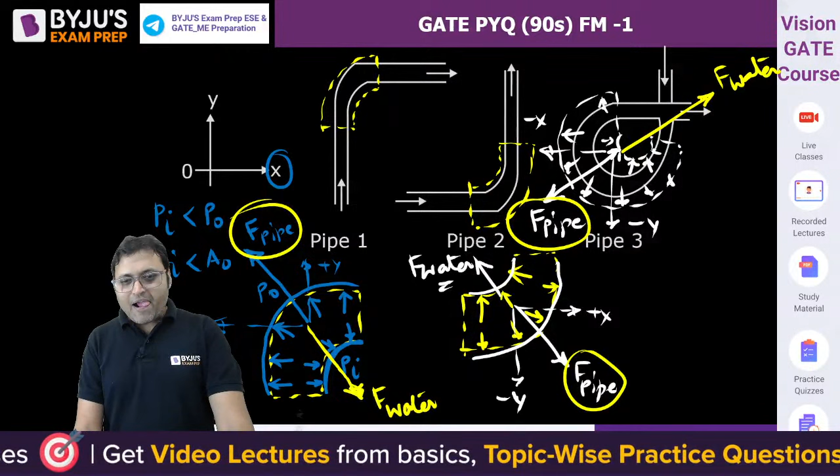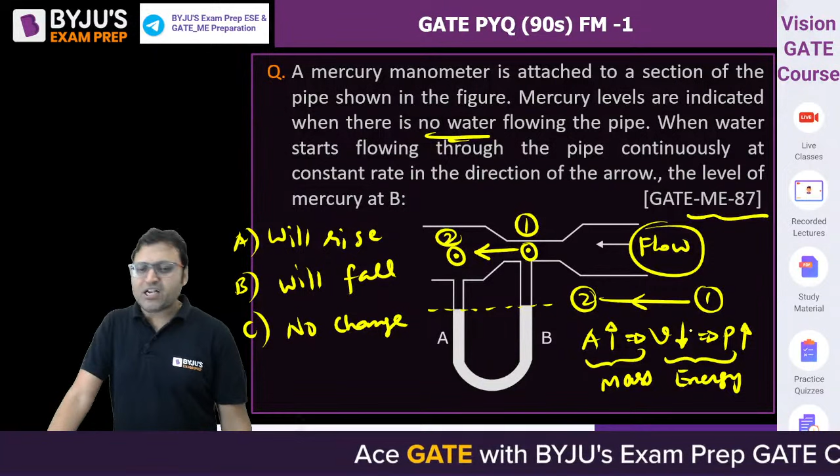This is the Bernoulli principle, about energy, and this is about mass. Because of mass conservation or the continuity equation, if there is an increase in area, velocity will decrease and pressure will increase. So can we say P1 will be less than P2? At point 1 the pressure will be less, at point 2 pressure will be more. So if P1 is less, the level will rise, isn't it? P2 is more, so the level will fall.

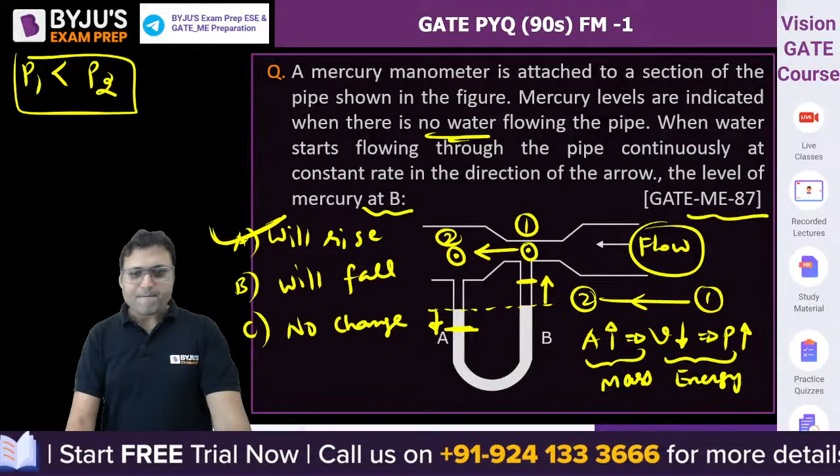Do you get it? So at point B the level will rise. At B the level will rise. I hope this is clear. The next question involves the inverted manometer.

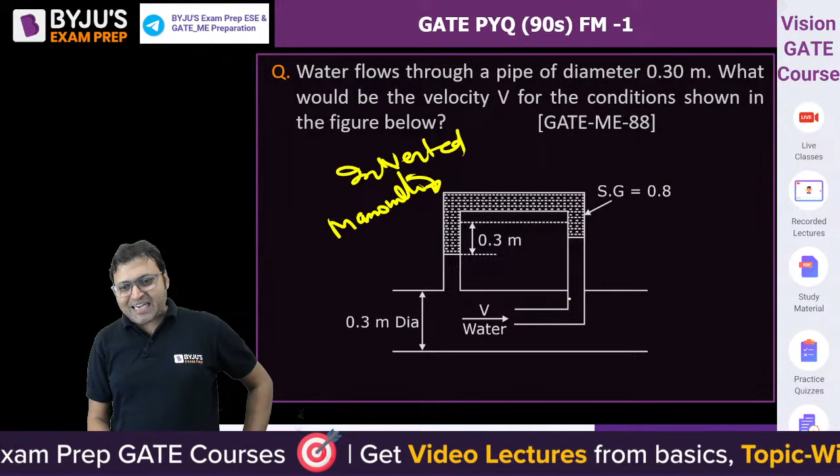It is actually an inverted manometer attached to the pitot tube. So the question is to find out the velocity V. Velocity V is equal to Cv into under root of 2gx. X is this manometric fluid deflection. Then it will be 1 minus SM by SF, because it is an inverted manometer.

Cv is not given, so we can take it as 1. That gives 2 into 9.81 into X. X is 0.3 into 1 minus specific gravity of the manometric fluid. The density of manometric fluid should be less than the density of the flowing fluid in case of an inverted manometer. 1 minus 0.8, the flowing fluid is water, that is 1. That will give you the answer.

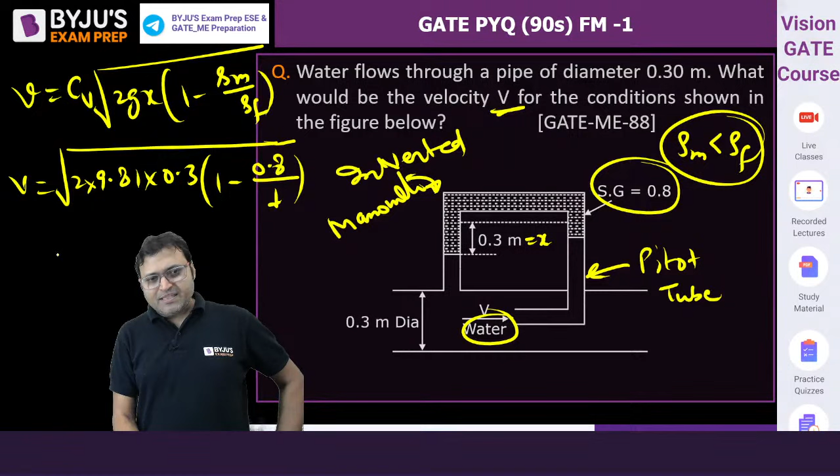What is the answer? Meter per second. Are you getting 1.085 meter per second or not? Are you getting it or not? 1.085.

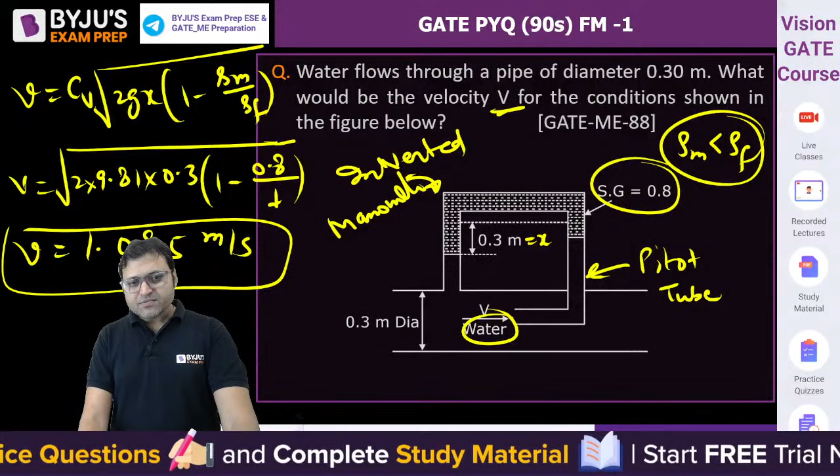You should get 1.085, right? So more questions we will discuss in tomorrow's session.

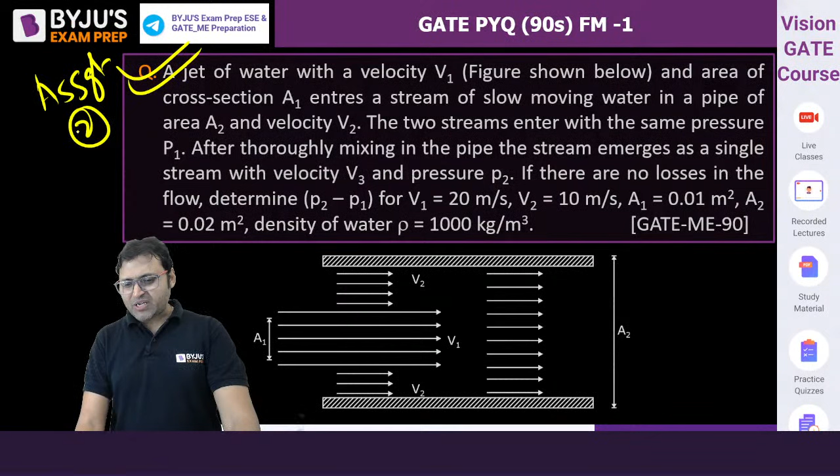Let me give you a couple of assignment questions. Tomorrow we will discuss these questions. This is your assignment question, and this is another assignment. These are two assignment questions. Please try to solve these at home. I will share the PDF also. And this is all from my side.

Tomorrow at 9 p.m. I will be taking fluid mechanics part 2. The dynamics will be discussed tomorrow. A couple of questions I have discussed from dynamics today, but the remaining part will be covered then.